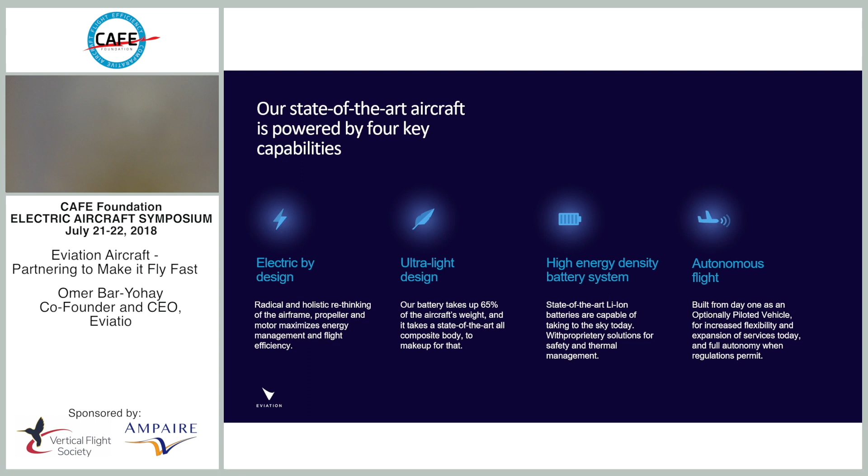So what's the purpose of autonomy if you want to go fast to market? Well, I assume most territories will allow my airplane to fly with parcels, not people, because it's damn hard to certify. I think if there's going to be a Sputnik moment for this room, it's 50 airplanes like this flying autonomously with parcels in some godforsaken area of the world.

Why not? The next point is we want to see these planes self-arrange, meaning regional transportation is many things, but it's mostly seasonal. You fly from Boston to Martha's Vineyard, but only on Thursdays, maybe Fridays. No one flies Wednesday and no one flies Saturday, but you do fly back Sunday. How do you move your planes around? Well, with plenty of pilots and plenty of dollars. We want to change that.

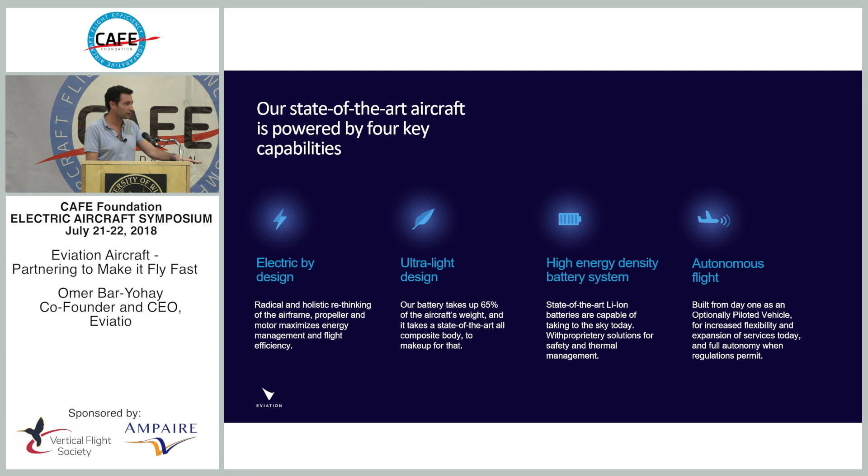That's the whole point of autonomy for us right now. Why? Because it's possible in today's regulatory environment. Remotely operated, it's a weight exception for a drone. Let's go to work.

What do we do and what's our timeline? We will ground test at scale, meaning the full-scale aircraft with its passengers, by the end of the year. We will start flying it with people around for the next Paris Air Show. That's why no videos, no pictures, no nothing. You want to see it? Come to Paris.

3 aircraft will be manufactured by the end of 2019 for the certification process, and yes, we do intend to do it fast. This is a mistake, obviously. It's 2021 — it doesn't take one quarter to certify. But we are beginning certification in 2018, and we do intend to finish it in 2021. One quarter after that, we will have 2 launch customers operating. If we're one year wrong, that's nice. It's still really early, but this is more or less the plan to work.

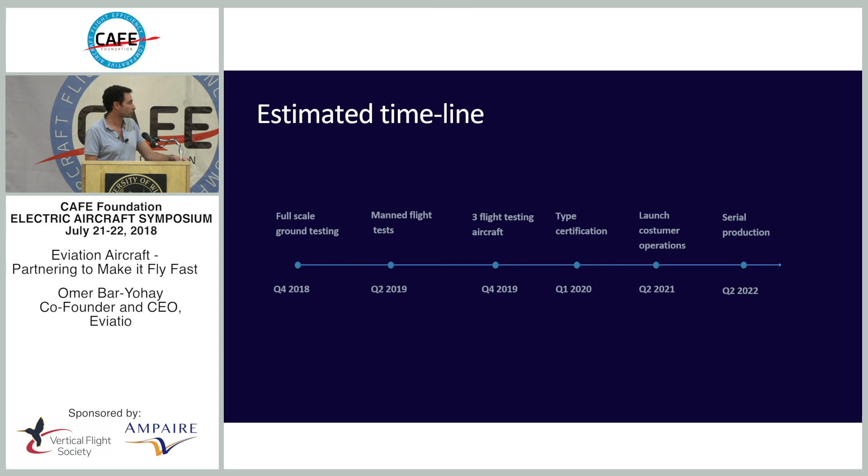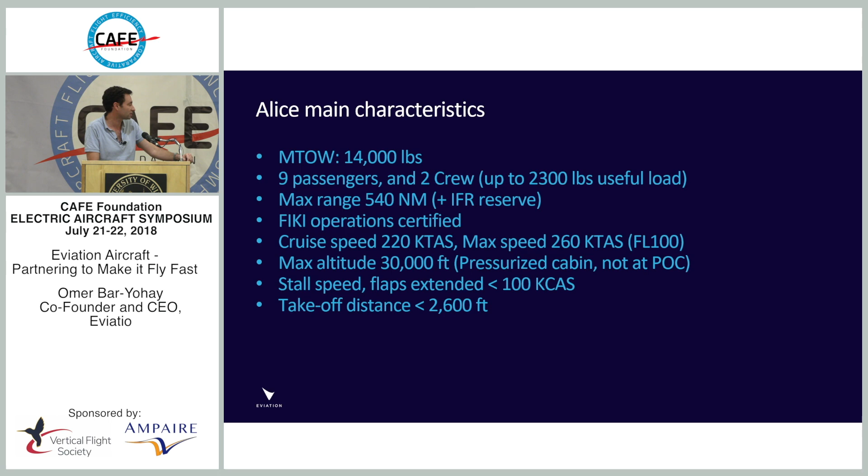Stall speed is not too slow. We found that our customers actually like it. That means that if they do get to land at a big airstrip or a big airport, they can get into final or base or whatnot with the jets. They can actually get there fast. And our takeoff distance, for a 50 feet obstacle, is 2,600 feet, which is kind of short.

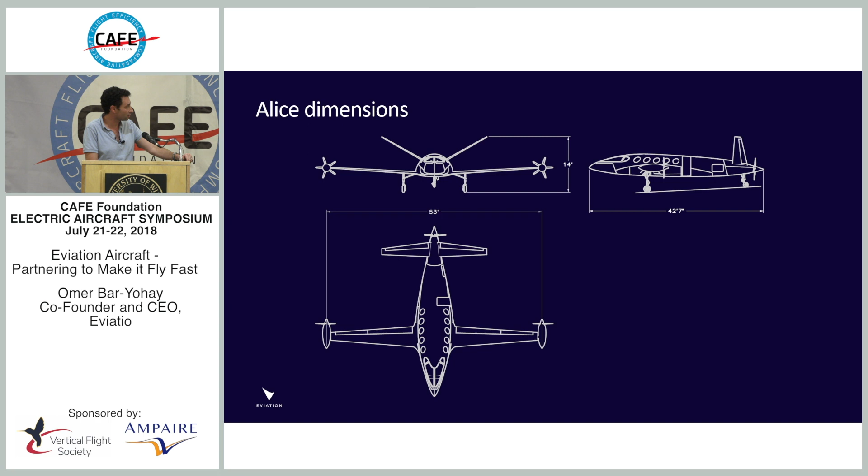Sizes, yeah, you can see it. It's a big plane, 53 feet wingspan. If you look at the wingtip propellers and include them, you're at 60 feet. And it's a big plane.

It does crazy stuff, and I don't want to go into all the details of what this plane is like to fly, but I want to show this and explain why electric through this. When you build an electric aircraft, you make it more efficient. We claim you also make it a cheaper solution for transportation as a whole, not only for general aviation kind of replacements. But what you also make when you do distributed propulsion at that scale, or a different scale, is that you give your design some new capabilities that we need to think about.

One of the most significant things when a pilot sees this aircraft, he's like, wait a minute, I'm doing banked approaches all the time. I fly out of those small airstrips, I don't always have the option to take a different angle. So 15 degrees bank when you approach, well, that's doable. Can you do this with those wingtip propulsors? They're going to hit the ground. It's going to be a mess.

One of the amazing things that happens when you have fly-by-wire and can control your propulsion systems hundreds of times per second is that you can handle problems like turbulence, or like what we'll see here as a crosswind, in a different manner. Because we have wingtip propulsors, you can do yaw with differential thrust, not with your control surfaces.

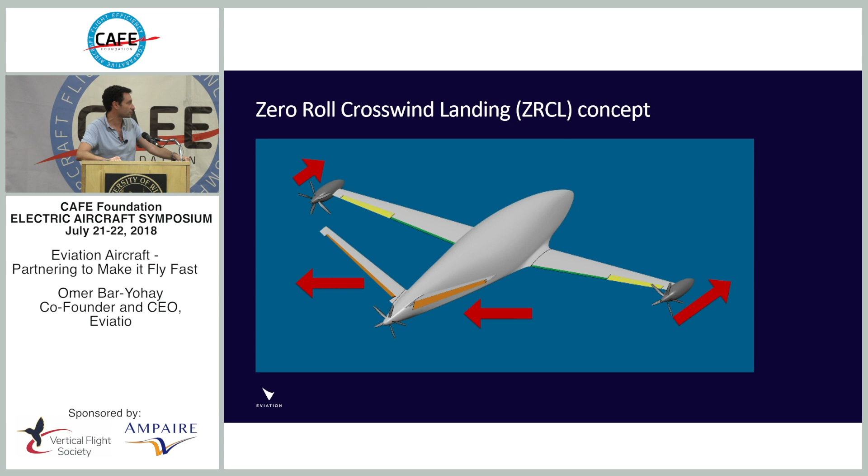But what happens if you do both differential thrust and control surfaces? You can get a clean side force. That means you can do what we call ZRCL, very catchy I know, zero roll crosswind landing, meaning you don't need to bank your wings. All you do is differential thrust and throw your tail in the opposite direction, and what you really get is the ability to handle up to 10 miles per hour crosswind without any crabbing or any roll. That's landing in most conditions. The thing is, if you do this plus the angle we allow for a banked approach, you can actually exceed 30, and the proven crosswind we're going to work with is 35 miles per hour. So it opens up a lot of new discussions.

And what I said before about turbulence is part of it. Think of the kind of augmented stability you could have if you only had the ability to control thrust and control surfaces hundreds of times per second, instead of as fast as the pilot can jig a couple of throttles.

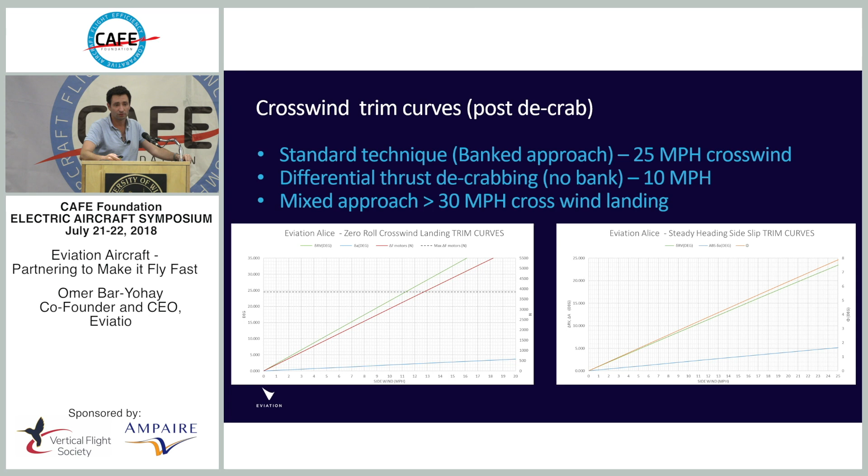So in a way, we have built this airplane as a fly-by-wire machine because we had to, because the only way to really govern 3 propulsors at these tips and get this done right is with a good fly-by-wire system. Once we did, there are plenty of features you can shove into that. It becomes a software problem, which is an interesting direction.

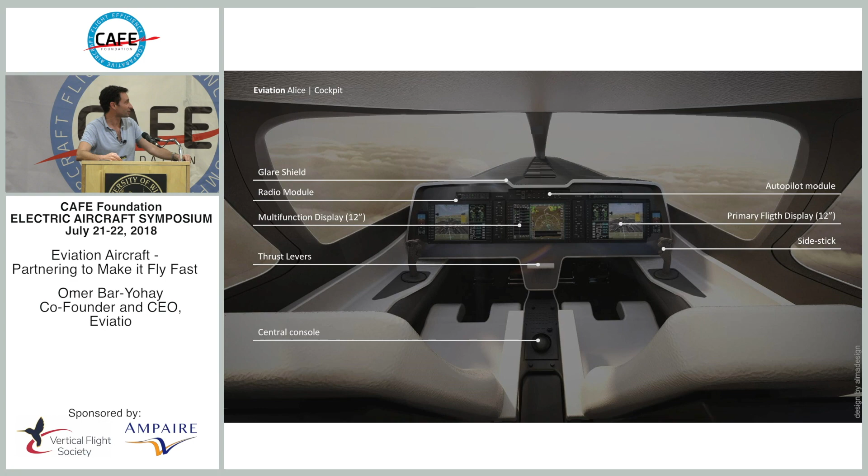You can't talk about an aircraft like this without beginning to show really nice renders and pictures, right? So we're actually choosing upholstery right now, but I'll go to this area, which is more interesting. This is our cabin. It's a bit different than what you would usually find, but what's interesting is it's slightly bigger than the King Air 350, let's say. In most planes, the center of the cabin is a bit taller, because this is where you walk back and forth, right?

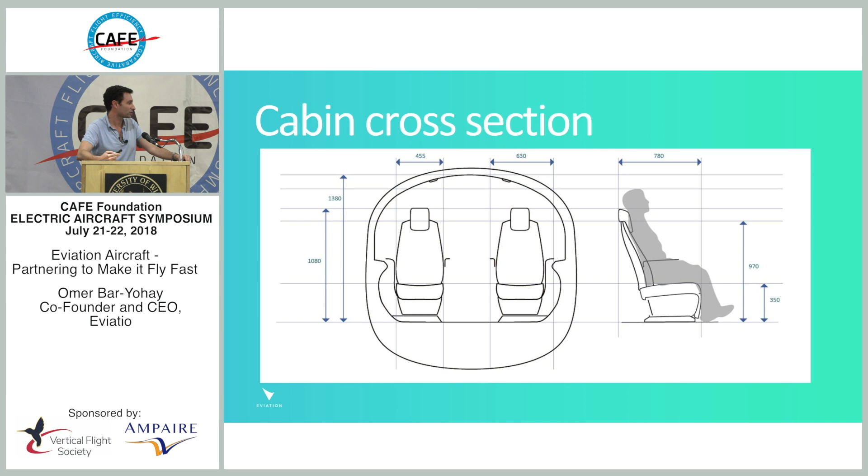So what we did with the seats is that we allowed them to move a bit and tilt a bit, so that you can get this effect, so that you can feel better when sitting in your aircraft.

Now, you don't really get there before you build a mock-up and you say, okay, this is bigger than a King Air, it's probably fine, right? Well, it's not. It's really crappy to jump into these aircraft.

And when we talk about acceptance and having millions and maybe billions of travelers in all sorts of new machines coming up soon, I don't know if you guys, well a lot of you are pilots, so that's not a good room to say this, but I know you guys flew in small planes before. But I'm thinking about my parents or the average American or average traveler as a whole.

You put them in a Cessna 402 and ask them how much fun that was. These planes jump, these planes are not comfortable. The average American of 1970 is not the average American of 2018, so they don't fit anymore. And the weight they can take is also a problem.

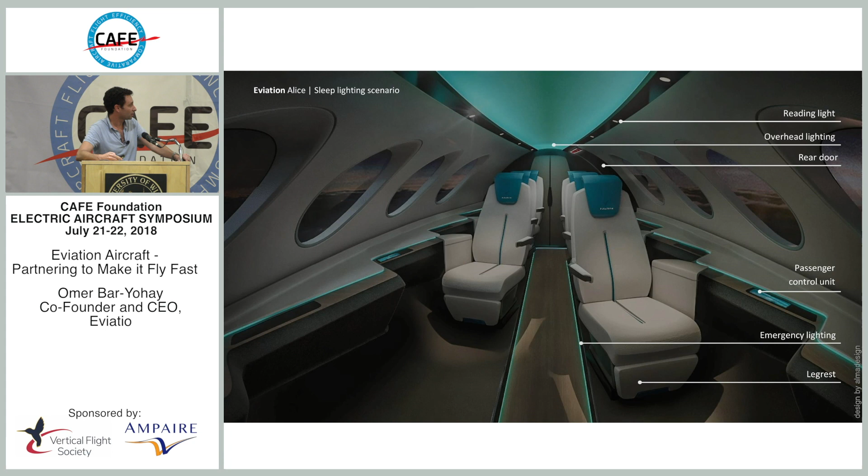So we try to take this into account. We build something really nice that gives you the look and feel of a business aircraft or a jet. What you see in the back is a toilet. Yes, we do have a toilet. And yes, we will take it out if you want more luggage room.

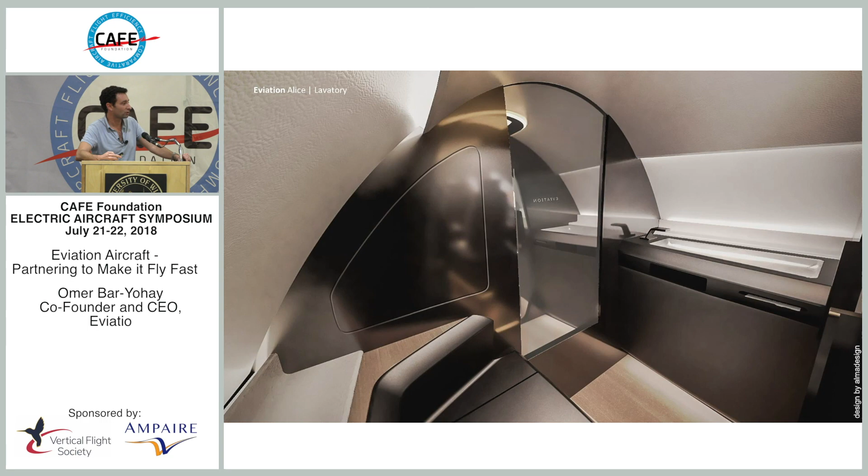What else can I tell you? This is what our airplane costs. It's $3.5 million today. By the time we do this continuously, with a few dozens a year plus, we'll be at 2.5. We expect it to arrive in 2022.

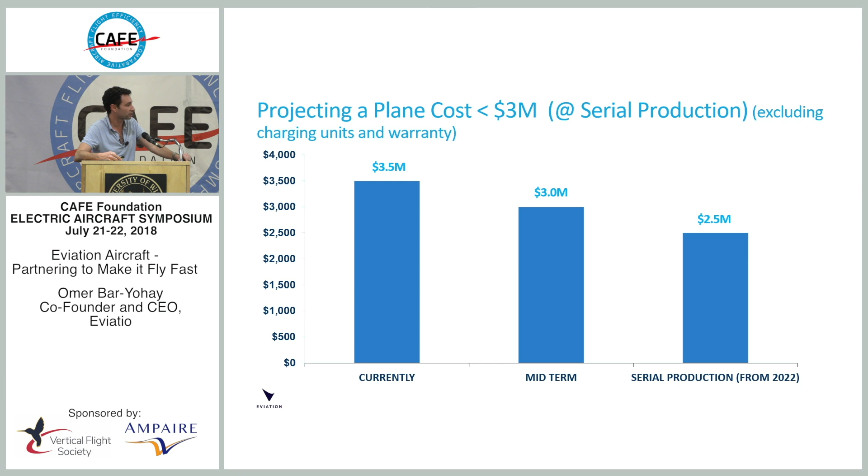This is what our airplane costs when operated 1,200 to 1,500 hours a year. This accounts for your direct operating cost. What you call here the estimated hourly rate does not include insurance, the cost of your airfield, and the cost of your pilot. Everything else is in.

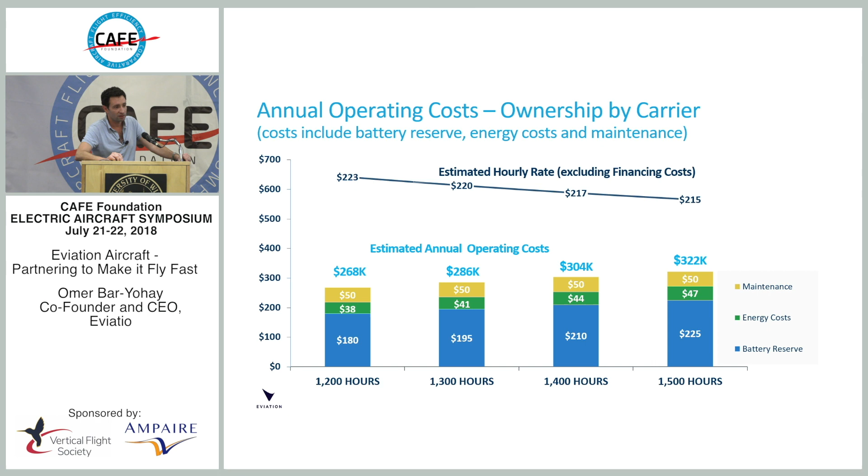If you want to compare this to the prevailing market, the Tecnam P2012 Traveler is probably the cheapest aircraft of that size ever built. And the Pilatus is just a very successful aircraft, but a turboprop. We're dramatically cheaper than the turboprop, and we are cheaper than the Tecnam.

But if you add the second, the right chart to this, and you understand that we fly nearly as fast as the Pilatus, you understand that actually in terms of cost per seat per mile, the numbers here are mind-boggling. These are bus numbers.

That's the promise of electric aviation the way we see it. Not flying over a city just yet. I would love to see it happen. I'm sure there will be great feeders for our products, but they're going to be late.

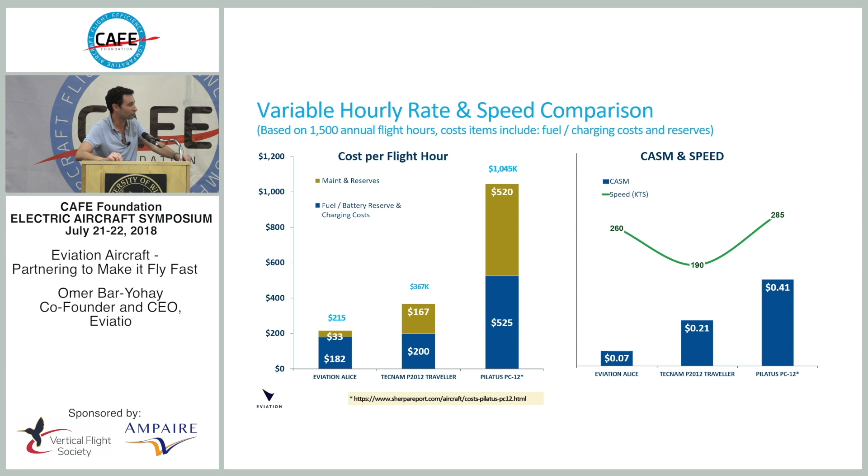The difference between what happens to oil and what happens to electricity, I'm sure everybody in this room knows, so that's boring. Thank you, and see you in Paris is all I have to say, but I would love to take your questions.

Questions? Anybody? Sure. I'm just wondering what happens when one of those wingtip propulsors fails. Very good question. First of all, it kills the other one.

And we can, I don't have the chart for this even in hidden mode, but this aircraft can climb from sea level roughly 1,200 feet per minute with all three propulsors. With only the tail, it can climb roughly 300 feet per minute. So we can definitely continue a takeoff while losing one of the wingtip motors and killing the other.

Now, one of the things we need to think about, though, and this is going back to regulation and how do we certify this and so on and so forth. First of all, you need to show that this really works, right? So this is what we do right now.

But when we as engineers sit and think about this, each of these motors, by the way, the magniX motors, the Siemens motors, any motor that size, and we have 260 plus kilowatts at each point, is intertwined, meaning it has 6 phases. 3 phases can work roughly 75 to 80% of the actual power output of this motor in a failure situation. But usually they work together because the limitation of these motors is usually not the ability to take in current, it's the ability to take out heat.